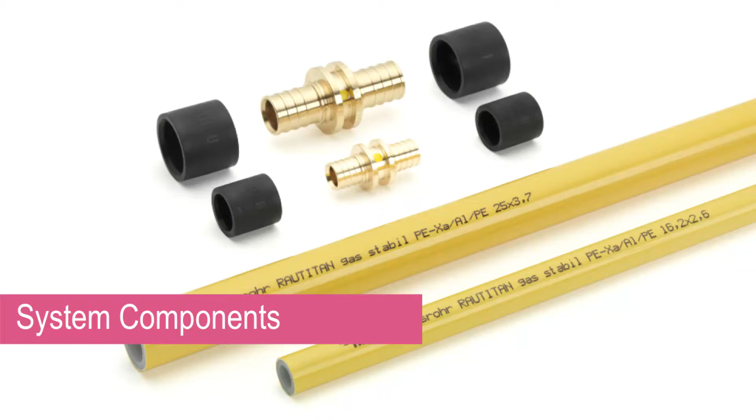System components. The first section of this training course aims to familiarize you with all the components of the Rautitan gas system. The Rautitan gas system comprises the Rautitan gas stabil pipe, Rautitan ONE fittings, and the Rautitan PX compression sleeves. Sizes are available from 16mm to 40mm.

As per AS NZS 5601.1, the gas system is rated for a continuous operating pressure of 70 kPa and an operating temperature of 60 degrees C. The pipes can withstand a maximum temperature of 90 degrees C for a short-term malfunction.

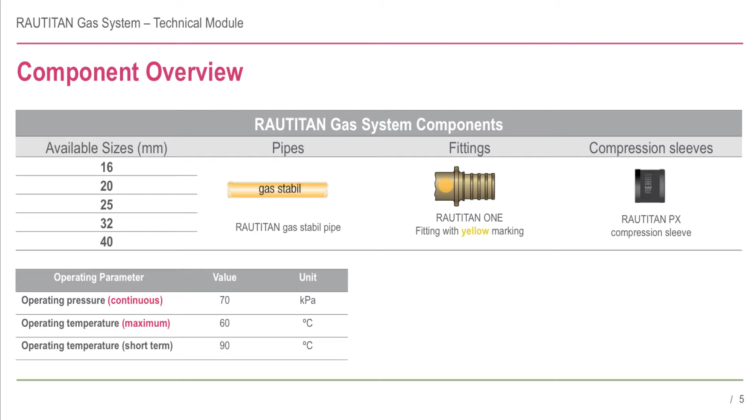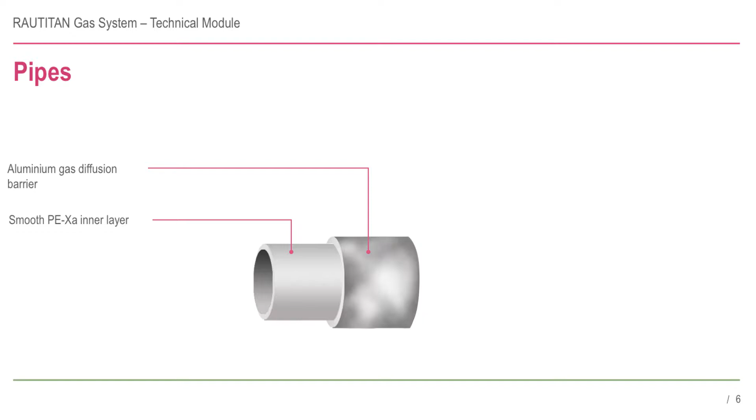Rautitan gas stabil is a multi-layer pipe and comprises an inner PEX layer supported by an oxygen-tight aluminium layer, which is then coated with an outer polyethylene layer. The layers are bonded using a long-term temperature-resistant adhesive.

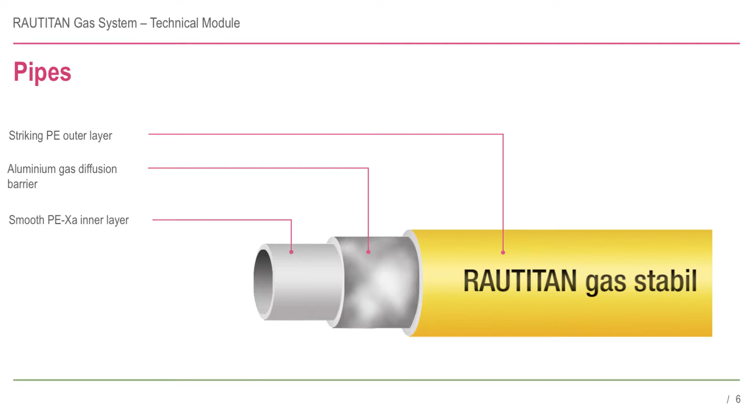The high malleability of the aluminium layer allows the pipe to remain flexible and manoeuvrable, while the thick load-bearing inner layer provides safety and excellent bending properties. As an installer, you will notice the increased kink resistance of the Rautitan gas stabil pipes compared to other multi-layer pipes.

The PX compression sleeves are manufactured from PVDF, a robust, lightweight and flexible polymer. The sleeves feature an easy slide reversible construction, eliminating the need to check sleeve orientation before making the joint.

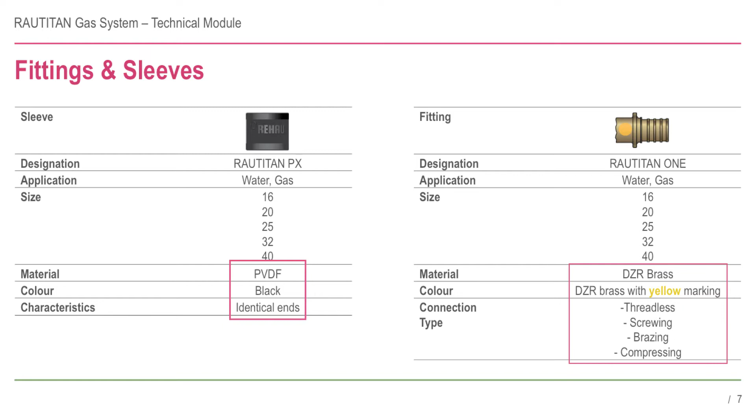The universal Rautitan ONE fittings are manufactured from high-grade special DZR brass and exceed the relevant Australian and New Zealand standards. Rautitan ONE DZR brass fittings are marked with a yellow dot to denote their suitability for both gas and water applications. The yellow dot also indicates that it has been individually factory pressure tested, adding another level of safety and peace of mind. PX and MX fittings do not have the yellow dot and cannot be used in gas applications.

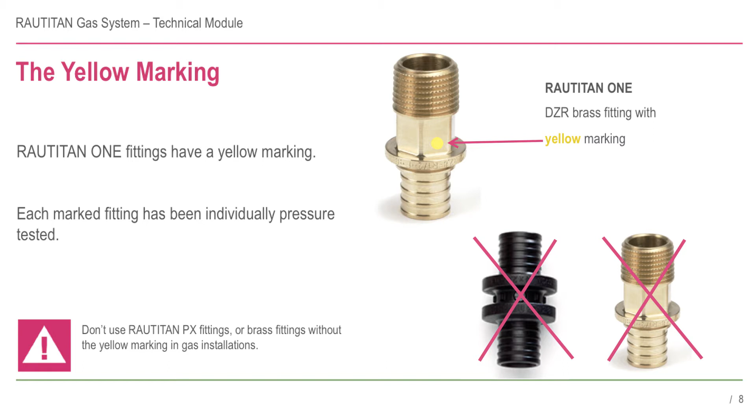The gas installation standard AS NZS 5601.1 was updated in 2013 and has been adopted by New Zealand and all states in Australia except New South Wales. New South Wales, however, has granted an exemption through the New South Wales Office of Fair Trading, and this means that the PX polymer sleeve can also be used in gas applications.

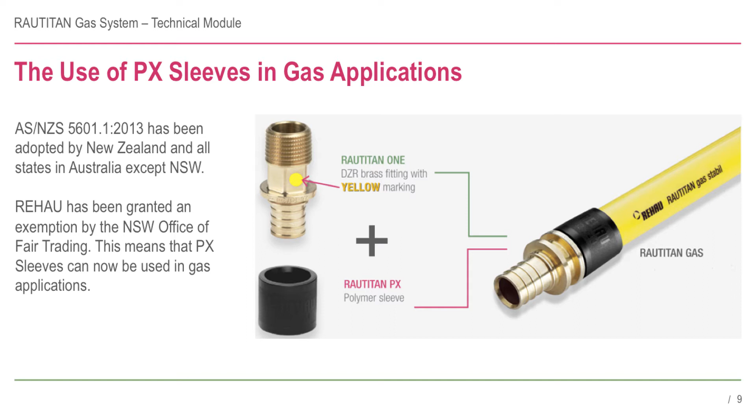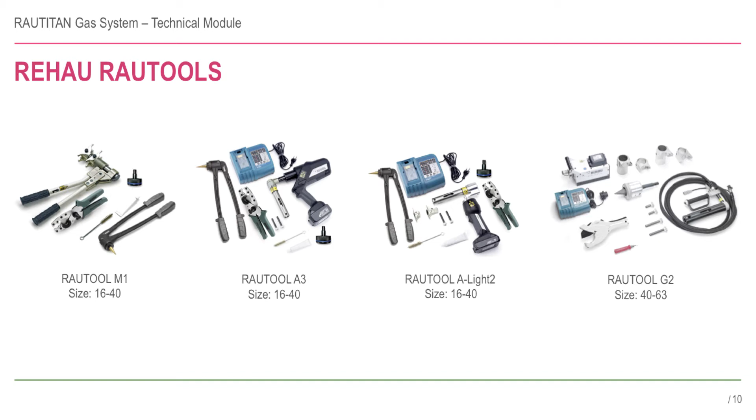Rehau RAUTOOL kits for gas applications consist of an expander tool, expander heads, a compression tool, and a pipe cutter. For Rautitan gas pipes, only 2 pipe cutters can be used. The green stabile pipe cutter is specifically designed for the Rautitan stabil and gas stabil pipes in sizes 16 and 20 mm. The red pipe cutter 40 can be used on stabile pipes in sizes 25 to 40 mm.

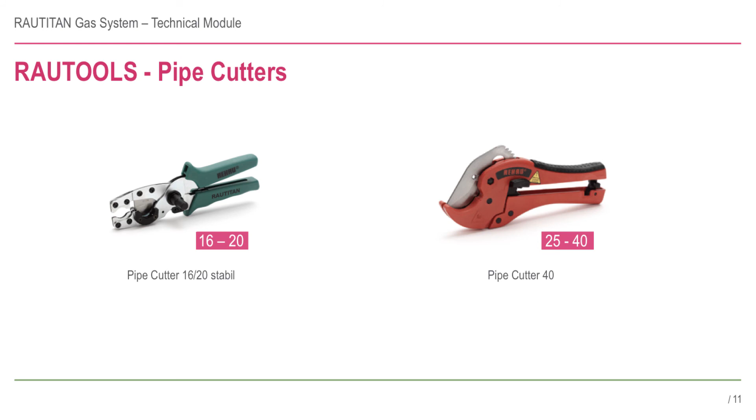It is important to note that this is different to standard Rautitan PEX water pipes. These specific size ranges are to ensure correct alignment of the pipe in all sizes. Always be sure to check you have the correct pipe cutter to suit the pipe you are cutting. If you have any doubts, consult the Rautitan technical information for a complete cross-reference.

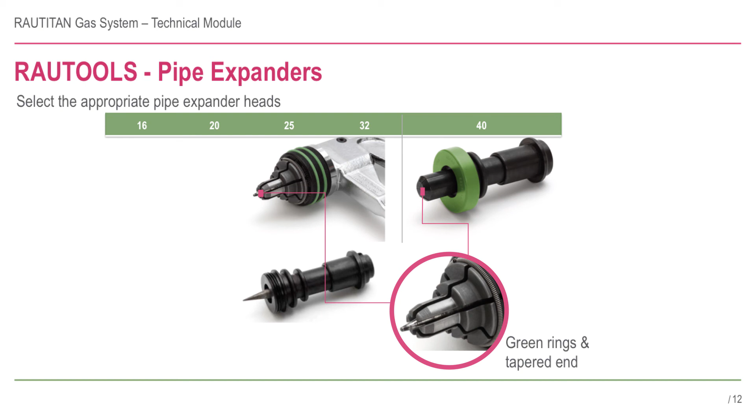Expand the pipe using either a manual or battery-powered expander tool. Ensure that you use only the green expander heads with tapered ends meant for use with stabil pipes. Do not use the blue-coloured expander heads, as these are designed for the standard PEX pipes and can cause damage to the gas stabil pipe.